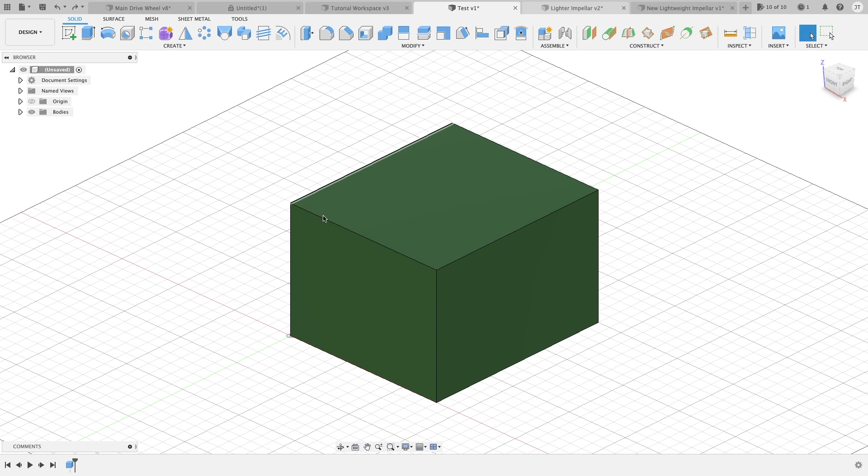We'll show an example with this box. We'll right click, create a sketch, and take a spline. We'll use some crazy geometry here, hit enter, and now we have a profile by which we want to split the box.

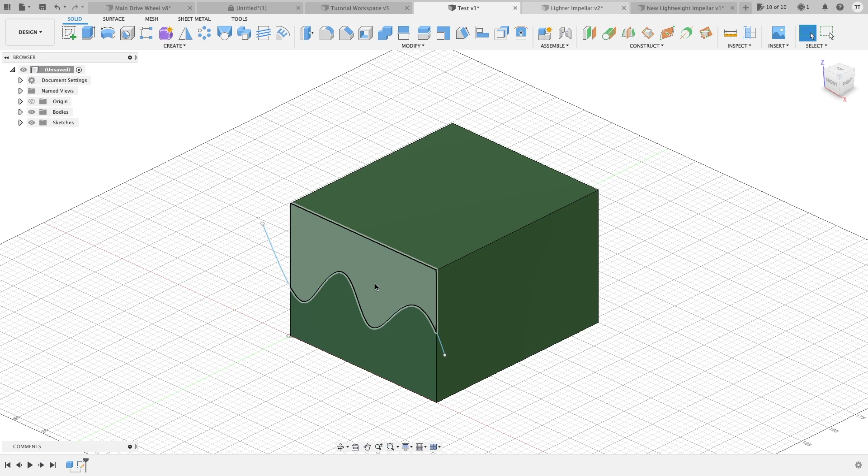We'll go over to split face, and as you can see in this box, it shows kind of what we did here. You can use regular lines, you can use other profiles, but in this case we're just going to do how it shows in this box.

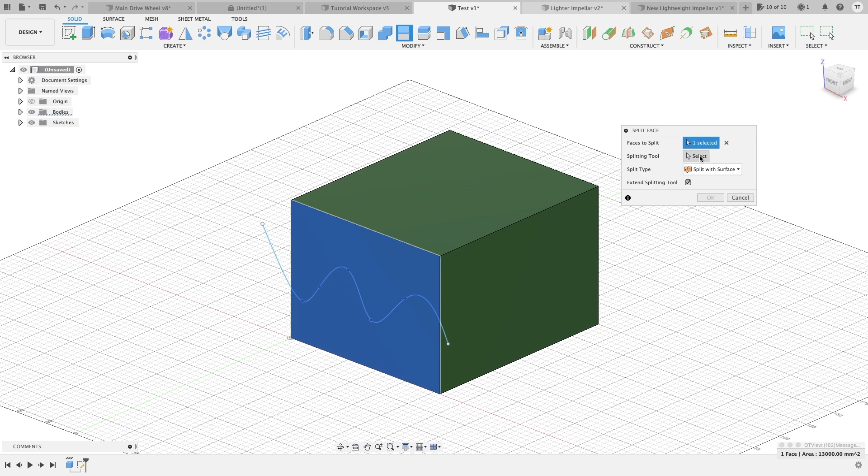We're going to hit split face, and what this does is split the face we're on. We'll select it, then go to our splitting tool, hit select, and highlight this path. As you see, it puts through a red line and highlights, going all the way through.

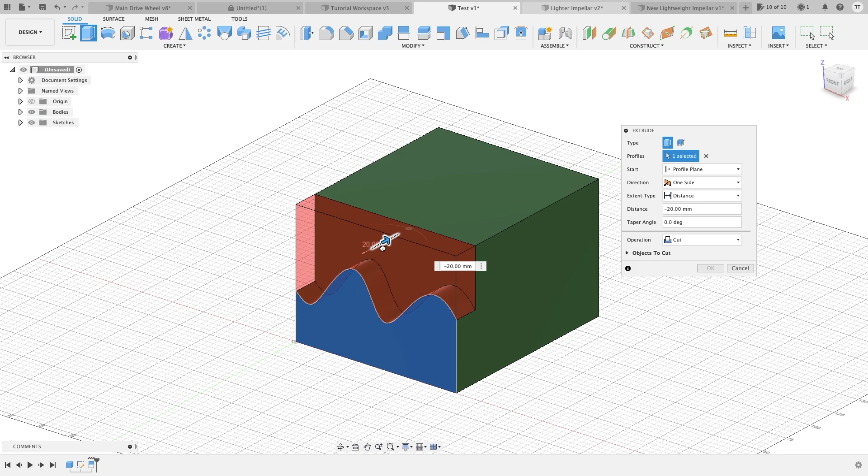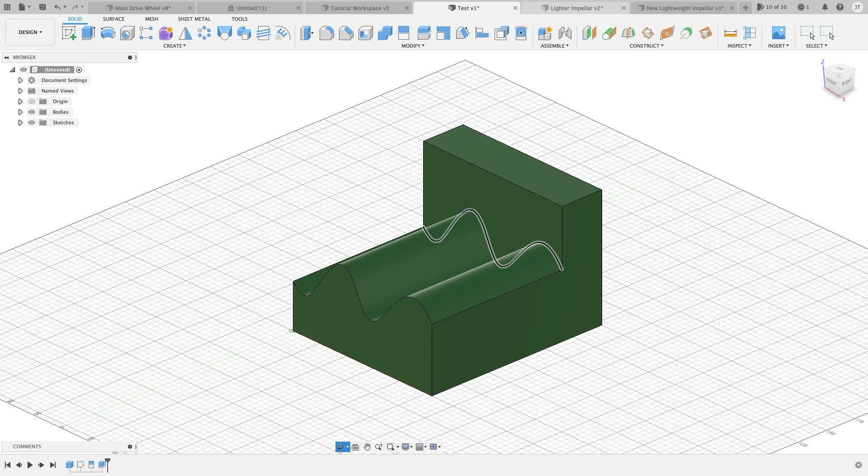Once you hit OK, it now splits the face, and now we can select one of the faces we want, hit extrude, and we can now extrude inward by that profile. We can cut, join, intersect, new body, all sorts of stuff. In this case we'll go ahead and cut, and now you have a profile in which you were able to extrude. That was kind of a crazy one.

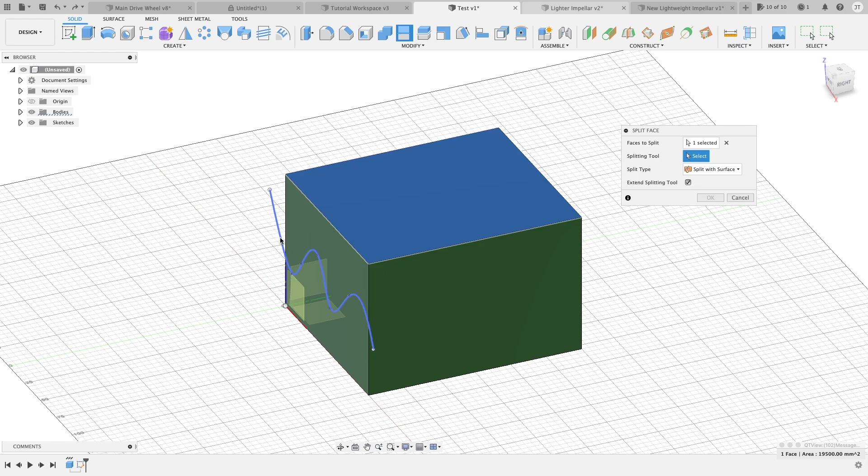I believe you should be able to split these up also - if you do split face, we'd click this one, the splitting tool would be this one, and it would split this face as well. I'm not sure if it would work for the top. Let's try it - go here, select. Doesn't look like it would work.

But anyway, you have to be on the same plane as the squiggly line. So what we'll do for our split body, which is a little bit different.

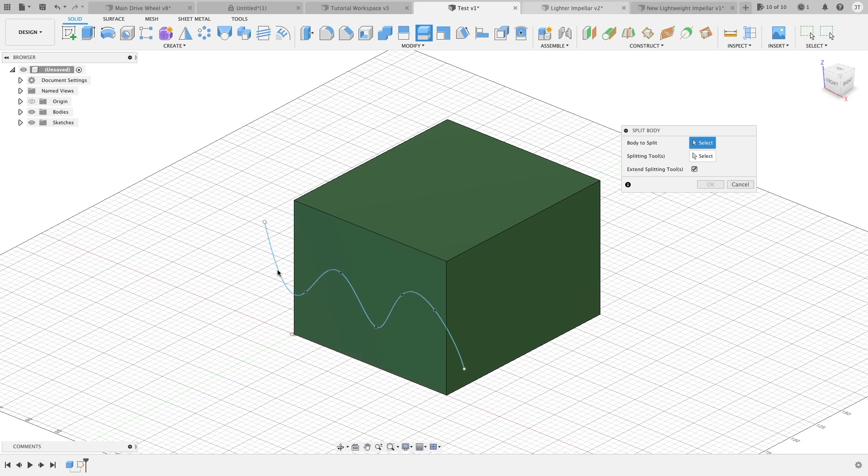Split body, as it sounds, is very similar to split face, although we're going to split the whole body. We select this whole thing here, do the splitting tool, and as you see, it does the same thing. However, it cuts through the whole object instead of just the face, going all the way through.

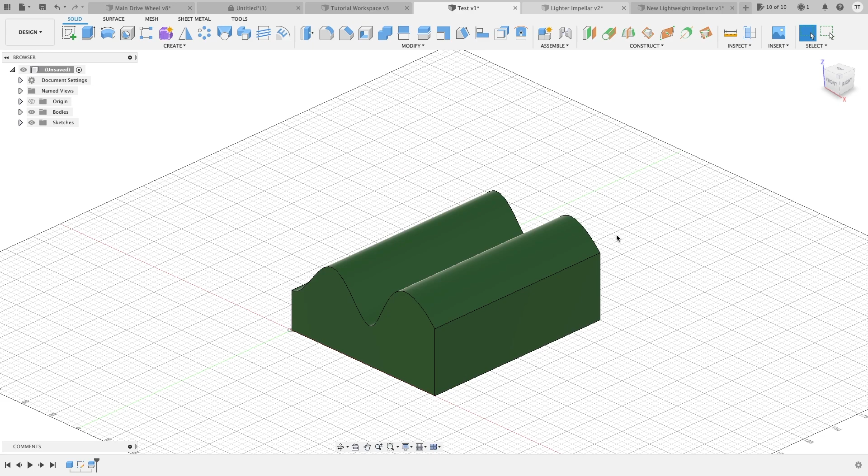Now these are two separate bodies that you can separate. As you go over here, you can make them visible or get rid of them. Very neat tool - you could use it on spheres, cylinders, really whatever you need to make an intricate design or cutout in.

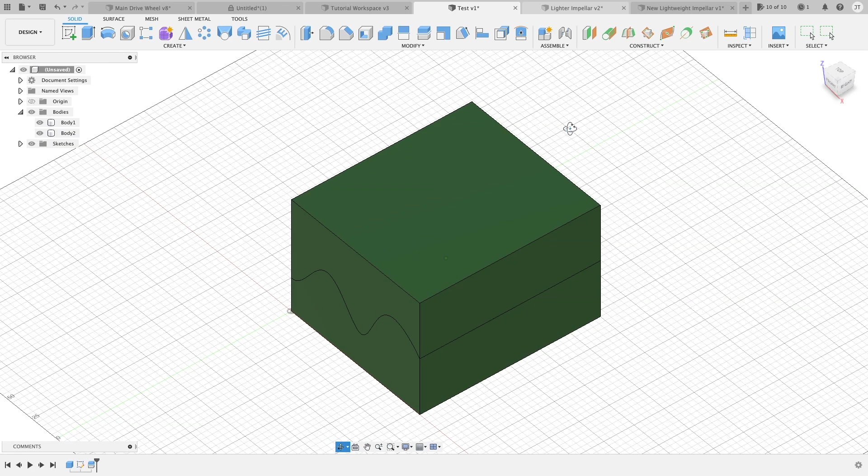Very useful indeed. That is pretty much basic. There might be some more things we could have gone into, but as always, we want to keep these videos short. So hopefully this was helpful.